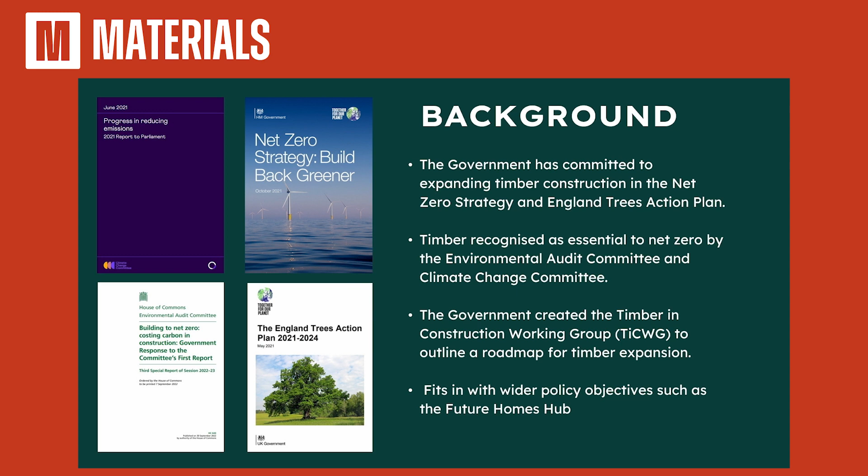You had a lot of heavy industries which were being increasingly regulated in the utilities sector, but construction wasn't looked at in quite the same way. And then, as government looked at it, with a variety of different reports, particularly those from the Climate Change Committee, they realised that particularly the embodied emissions within construction materials were a huge factor towards the overarching emissions profile of the construction sector as a whole, and that we needed to do something more about it. What was an obvious material to turn to? Timber. And so the Timber in Construction Roadmap was created, or Timber in Construction Working Group was created.

We've been through quite a timeline with it, as you can see, through a whole range of initially forming a kind of a sector plan, a whole range of industry subgroups, a range of industry and government co-workshops, both held with our own organisations, a range of other organisations in the sector, architects, engineers, different material sectors as well. Came forward to really at the end of last year was when we finalised the actual contents of the roadmap and the structure of it, and then published it in December 2023.

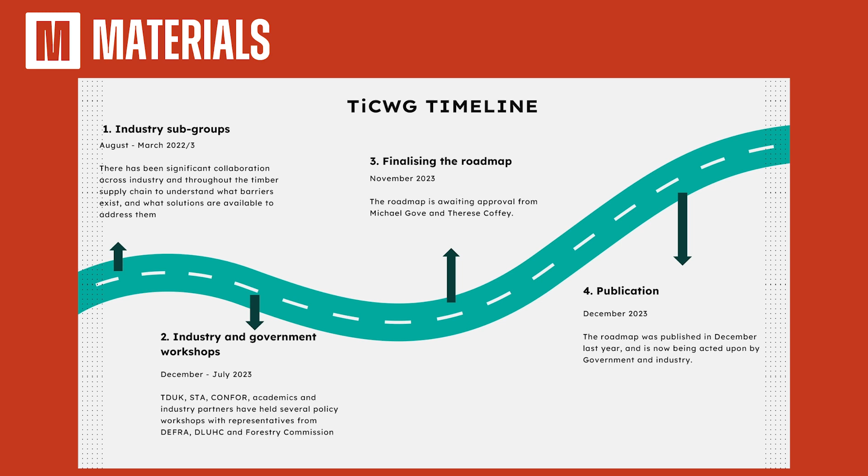And you can download that if you Google it on the gov.uk website. You can download that report, you can download the whole roadmap, and go through all of the different areas that it details. In particular, we had 7 different working group themes throughout the whole area. And I've got to say that within this, there were several kind of policy objectives trying to be met at once.

Within the whole climate sphere, it's not just the materials we use, but also the supply chain. Within the timber industry, the government recognised that if we want to meet our climate targets by 2050, we're going to have to grow a lot more trees, and our forestry sector is a hugely important part of that. So on the supply side, they saw this as a market mechanism to stimulate the growth of forests and stimulate the planting and management of those forests within the UK.

They looked at demand and how we're going to build up demand, building safety, as Andrew has mentioned, the insurance sector, and how do we reassure that sector about building with timber, carbon and all the questions around it, getting clarity about how it's measured, how it's managed, what things are taken into account, what visibility we give to our products and the supply chain emissions and the buildings themselves, the skills that we will need to achieve this.

It's not uncommon in construction to be talking about skills. It's a problem for everybody, but particularly if you want the construction industry, which is a fairly conservative sector, to move and start building in a different way with different materials. Where are those skills going to come from? Who has the knowledge to start teaching them? How are we going to actually get that done?

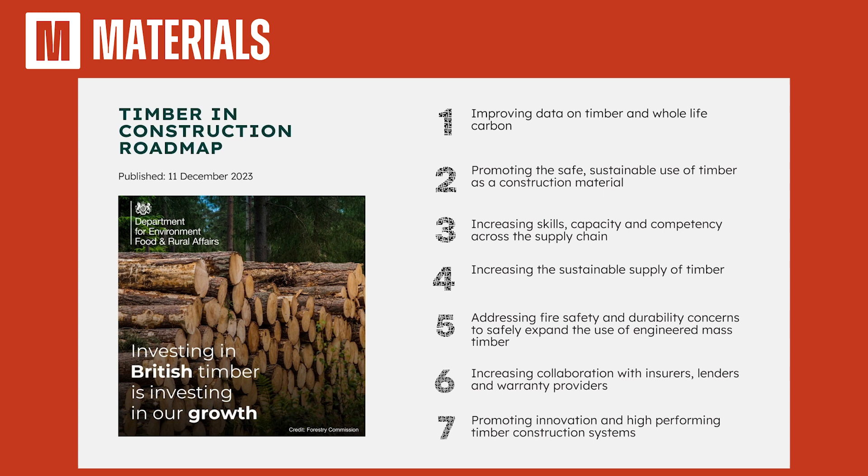So we're looking at improving data on timber and whole life carbon, promoting the safe and sustainable use of timber, increasing the skills, capacity and competency across that whole supply chain, increasing the sustainable supply, which is a big issue we can talk about in a minute, addressing fire safety and durability concerns, increasing our collaboration with insurers, lenders and warranty providers, and then promoting innovation and high-performing systems.

So those are the areas, and I just want to run through fairly quickly what those are, what we've been discussing, and then what we've been doing as an industry to make sure that we're meeting them all.

So in terms of improving reporting on embodied carbon, with each of these themes, there were a set of tasks that the government have said they will commit themselves to doing, and there's a set of tasks that we've said as an industry we will commit ourselves to doing.

So the government is going to look at putting embodied carbon limits for buildings in the future. There have been moves to try and put that through debates in Parliament and so on already over the past year or two, and I think it'll come back almost every year until it happens. I think there's quite an increasing groundswell towards it.

Looking at effective, proportionate ways of deploying broad carbon assessments, and really looking at the evidence base for the claims made, then working with industry to expand and improve the evidence around that. We've said we're going to continue our voluntary work to keep measuring and reducing embodied carbon, encourage the inclusion of data on all the projects that use timber, and improve the quality of our EPD database.

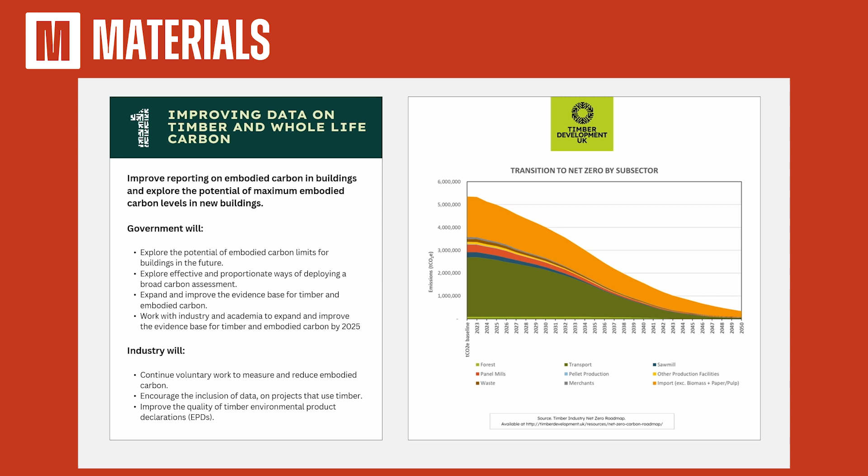So what have we done? Well, earlier this year, we released a whole EPD database for timber products. It covers about 95% of the common construction products that you're going to use in any project. It's got full life cycle assessment data on all of them. We've had all of those verified so that it's enough for designers, engineers, whomever, assessors, to be able to make those calculations using this data in a verified sense at the very outset of your designs and at the very outset of your project development.

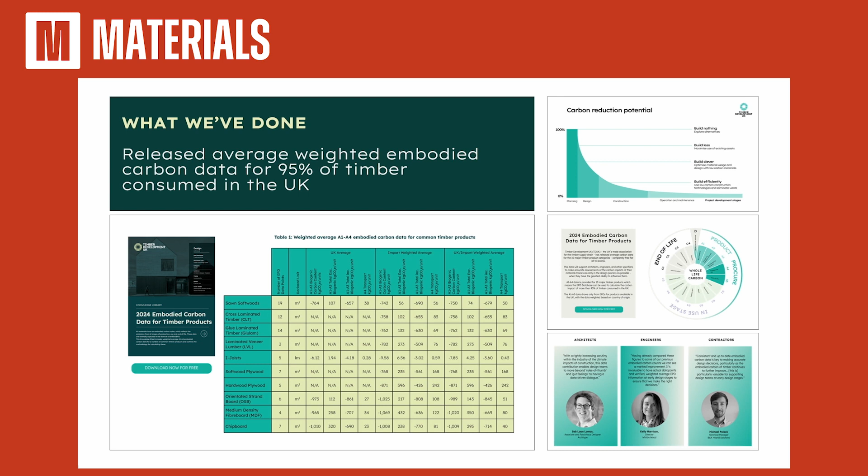So all of that data is available. Monthly now, we publish and run a webinar on a building case study. With each of those case studies, we've captured carbon data, the calculations that the engineers, architects or developers have used to get to that point, and we run those as a webinar. You can tune in, it's free. We have a lunchtime webinar every month, looking at those different case studies.

It talks about the whole project, and the carbon calculations and environmental calculations are a key part of those. We're going to keep doing those every month to keep pushing that out, keep familiarizing people with it, and try to move people towards a common form of assessment on carbon. But at least within each of those case studies, you can download them for free from our website, so you've got all of that data and information, and people can start making use of it.

So it's just some of those. Last year, we also published a net zero roadmap for the entire industry. Not so much looking at the carbon figures for the products, but really looking at the industry as a whole, saying how do we measure, report, and reduce the emissions through other activities, particularly transport, but also the factory operations, sawmill operations, and so on.

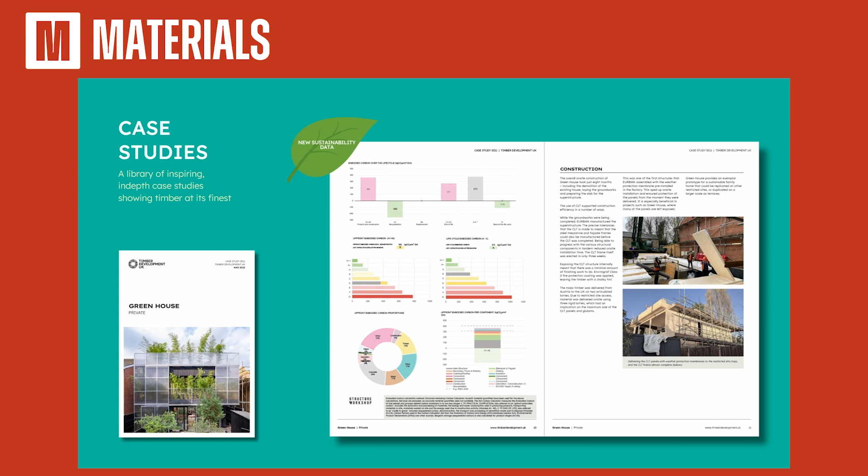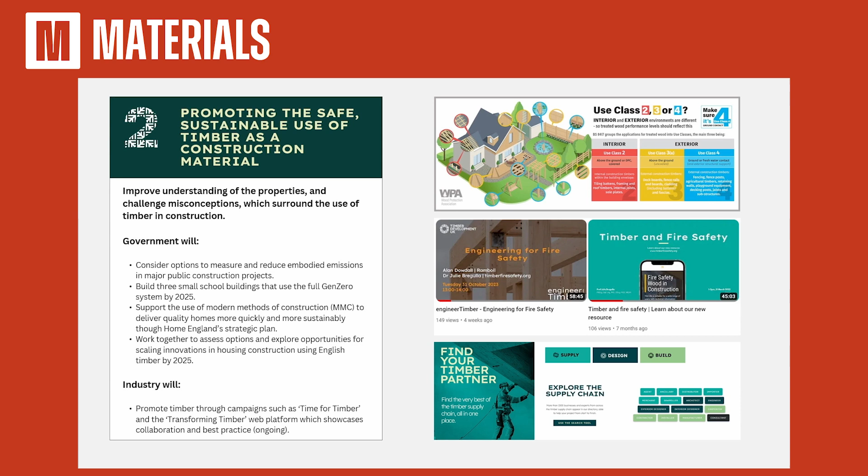The brown one there is one of the webinars I talked about, the Engineer Timber series that we run. We've created a timber and fire safety website between our three organizations, and we have a whole range of other activities between us. We've got a whole range of publications which are free to the market, so engineering data, architectural information, all those sorts of things on a range of different areas.

And there is a central campaign from the Structural Timber Association called Time for Timber, which you may have seen, and you can certainly follow that on social media. It's a very active campaign to promote timber.

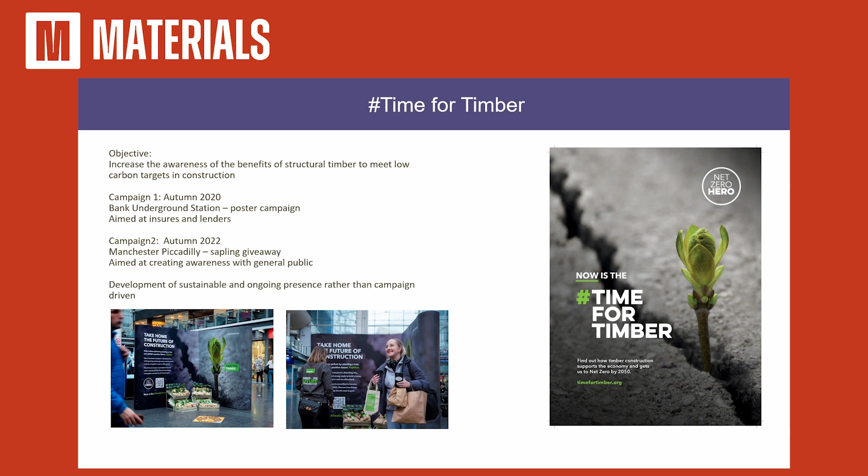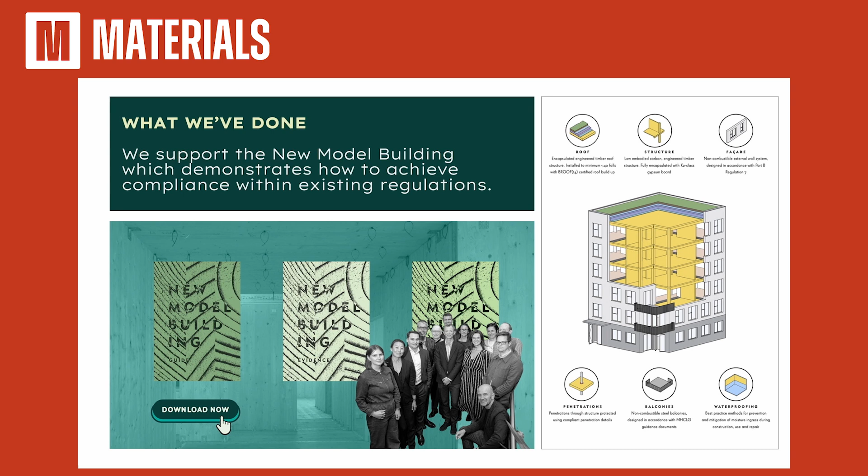We've also been looking at supporting a whole range of other activities, particularly the development of a range of details. This particular one was from the architects Waugh Thistleton, called the New Model Building, which is free to download and free to access, and it shows you how you can build mass timber buildings within building regulations, meeting the slightly stricter regulations from the GLA here in London, and those things have all been made available and free for you to use.

So in terms of skills, capacity and competency, and I said at the start, this isn't unusual to us, this is for everybody. Everyone in construction is facing a massive problem, a huge cliff edge, where I think the average age of most trades now is in the mid-50s, and those people aren't going to stick around forever. How are we going to build buildings in the future?

There is a really problematic point that we're reaching, and particularly with building in timber, we've still got to go through a process of teaching the teachers so that they can then teach others the knowledge and the skills. For anything that is considered novel, new, or innovative, that was always a problem to find the teachers to do that. We've got a range of things going on.

The government is establishing a multi-stakeholder committee, or industry forum, to look at how we develop those skills, map out where the key areas are, what are the flash points, what are the touch points we really need addressed now, and what do we need in the short, medium and long term. That group has been named and formed, has not yet met, but we will be meeting in the next month or so.

We're also looking at, the government is conducting research at the moment to really look at the workforce needs and demographics and how we're going to change there. And again, really working with industry to work out what skills we need and how we're going to do that.

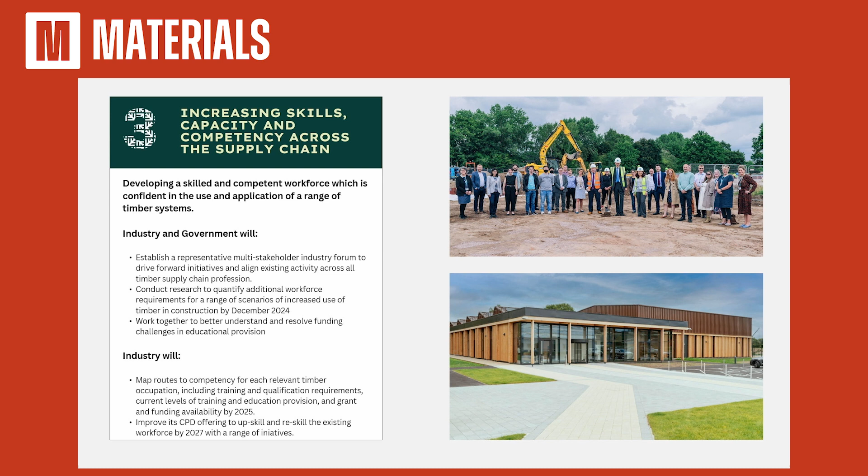So some of the things we've already done: we produced a timber in construction action plan last year. It was launched here last year, a year ago today, and it was a competency framework for the skills for design and construction. Looking at the supply chain, it was really on the design and construction side, and we started putting that into place.

So the first output of that competency framework was to develop a new course. It was the TED course, Timber Engineering and Design, which is taught at a new college, NMITE, the New Model Institute for Technology and Engineering in Hereford, done as a partnership with Edinburgh Napier University.

We've now run, I think, 50 learners through that course, ranging from architects through to people working in truss rafter plants or joinery companies, who can get together to blend their skills to learn the skills you're going to need for timber construction. So we've had a lot through there.

That course has now been disaggregated to make it even more accessible, into a series of shorter courses, partly online and partly in person at workshops. So that's come through really well.

We're going to be building on that now to look at a whole range of other programs that meet other elements of that competency framework, particularly contractor training and how you get the construction management process right for timber construction, which is a problem. Maybe it's not seen as a barrier because everyone thinks they can do it, but getting it right is a skilled process, and we need people qualified enough to do that.

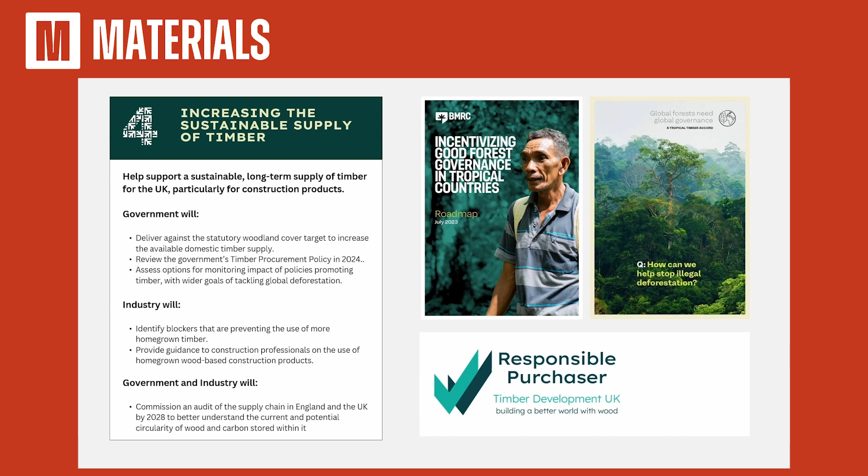On the responsible purchasing scheme, the organisation I run, Timber Development UK, represents the importers and distributors in this country. We've had a responsible purchasing scheme since about 2012, and it's a mandatory condition for membership. It means all members have to have a third-party assessment looking at the due diligence they're doing on their supply chains, to make sure all the timber they're bringing into the country only comes from legal and sustainable sources. We're doing a lot of work around that.

In terms of promoting homegrown timber, we do a lot of that as well. We've just recently published all of the C16 span tables. If you look at the grades of timber, a lot of the imported stuff from Scandinavia is C24, while the stuff from the UK is C16. We've published a set of span tables, free to download, showing that for the majority of house types and construction projects in this country, C16 homegrown timber is perfectly adequate and acceptable, and you can build with it.

I think there's a slight snobbery when you show people two different products - if one has a higher number than the other, that's the one you want because you think it's better. But actually, in terms of getting a product that is fit for purpose, so that you're not over or under specifying, C16 is perfectly okay. We have a lot of work now to demonstrate, not to promote one over the other, but to show what is achievable using homegrown UK timber.

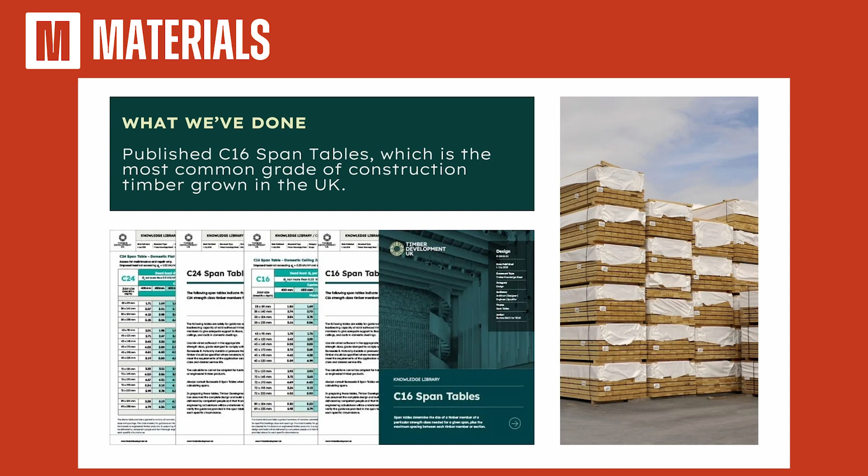Then when it comes to the more meaty end of the priority themes - addressing fire safety, durability concerns, to safely expand the use of timber - we've got a whole range of commitments. The government is going to work with us, with academia, with the Building Safety Regulator, to look at all the safety, durability, and competency questions, and see how policy could change to allow things in, how design could change, and how new details and new innovation in design can come through.

We've committed to continue supporting the Fire Safety Hub. We've got a website developed between our organisations - timberfiresafety.org, it's got all the words there. If you Google Timber Fire Safety, you'll find it. We'll keep on doing that, putting all the information up. It was only published last year, and it's got all the principles for design and for designing in timber with fire in mind.

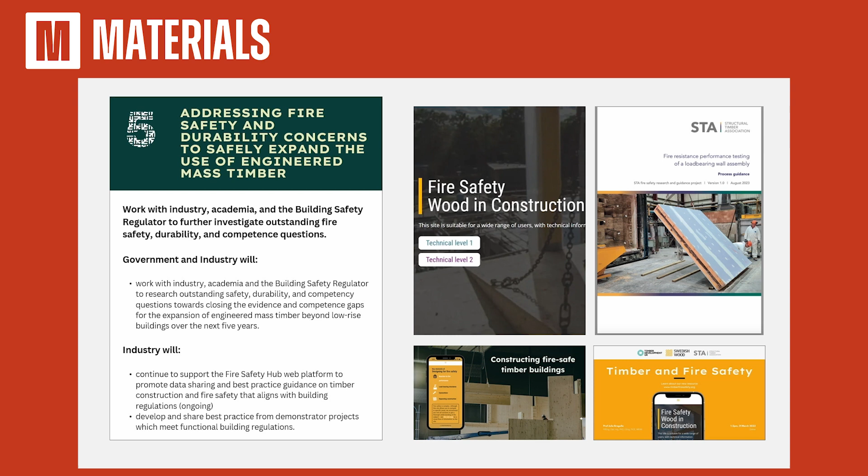And then we're going to keep putting up more information, more case studies, more details, and so on. We want to develop and share best practice from all of the demonstrator projects we've got going around the country. You can also download for free things like test data from that website or from the Structural Timber Association website.

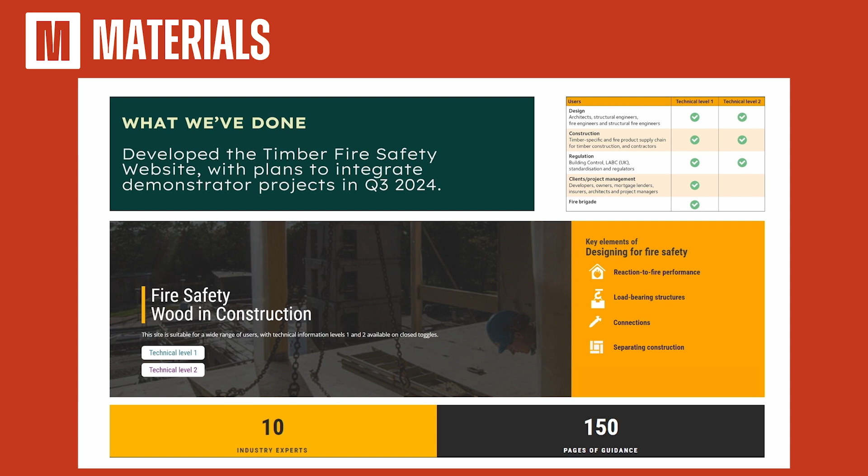So we've developed that website. Please do look at it. There's a whole range of other fire testing. I think the STA has spent over $250,000 over the past two years on fire testing and redoing old fire tests to make sure that things are relevant and up to date.

When we come through on the more commercial questions about increasing collaboration with insurers, lenders and warranty providers, all of that fire design, fire testing, fire guidance and fire design work is going to be key to them as well.

But we also want to look at the process of building and the process of getting insured, and what the different steps are to make sure that an insurer is assured that this is a safe building and understands what's going on. So we're working together with government on this to explore the feasibility.

Creating an asset register was one of the key asks in the roadmap, and working together to get greater dialogue between the insurance sector and developers, so that we can get a far better understanding of what the risks are, where they lie, and how you overcome and mitigate those risks.

Often, coming back a few steps, the risks are not the material - it's the skills and competency involved in putting the buildings up that really cause an issue, rather than the actual material itself.

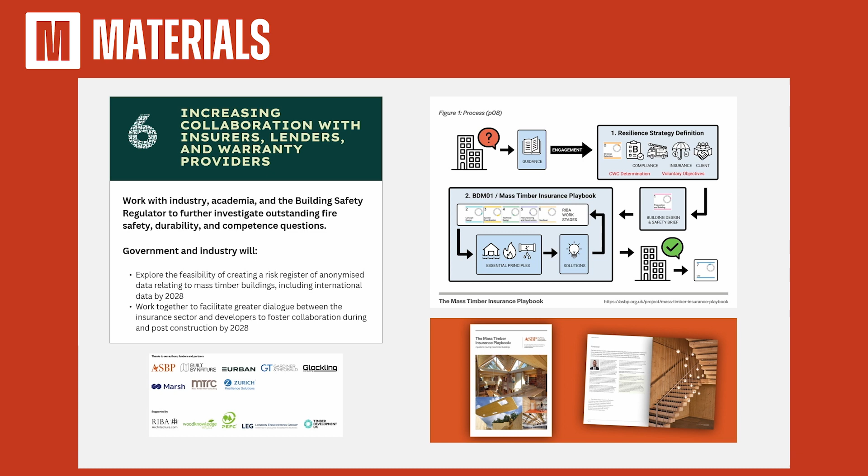So what have we done? Well, the STA Assure scheme is one that's now recognised in a lot of specification documents. This is a whole kind of supply chain program from factory through to construction.

It ensures that the manufacturers and the developers are working together. It's a whole range, it's an audited process, so that you have design and engineering standards, manufacturing controls, factory production controls all the way through, quality assurance, and that all of the follow-on trades are aware and knowledgeable about all of the care points and the duty to warn about them.

We've got a couple of other projects in development. It's a very early stage and they haven't reported back yet, but we should be able to get these going this year. We've had one meeting for each of these, and they're both projects really aiming to improve how risk is communicated, measured, managed, and got through.

So the first one is about a durability workbook. This is looking at one of the projects that has already come through, the Mass Timber Insurance Playbook, which is a guidebook for insurers in particular about the stages they need to look at, and about engaging early with your insurer, contractors and designers and design team, so that everybody fully understands the project being developed.

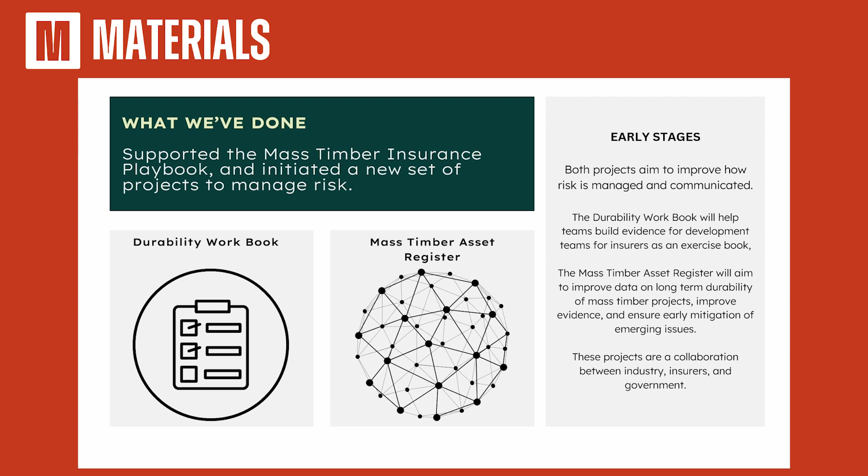It's a bit of a difficult one to manage, just in terms of privacy, data ownership, all of that sort of stuff, but I think we will be able to get through it. Those are, like I say, very early stage, and we're going to be developing those through the course of this year.

And then, when we look at promoting innovation and high-performing timber systems, really, again, we've got to work with government, got to work with the building safety regulator to further investigate what are the outstanding fire safety, durability, and competence questions that we need for this sector.

The government's committed to publishing a new PAS, publicly available standard, specification standard, for modern methods of construction, which will include timber, and promote the results from the Timber and Construction Innovation Fund.

So as part of when we looked at those seven themes within innovation, they set up an innovation fund. They've got a number of demonstrator projects which are going ahead now, particularly around the Gen Zero schools, and they're going to be publishing those either later this year or into next year.

We're going to carry on publishing. Like I said, we publish these case studies every month. We're going to publish knowledge, promoting the best practice throughout the supply chain, and make sure that it's freely available.

So we've got a timber knowledge library, which really goes from all of the basics up to very specific and technical areas, and we publish our case studies and webinars every month. There's about 150, I think, of these knowledge sheets and knowledge library documents that will be available by the end of this month.

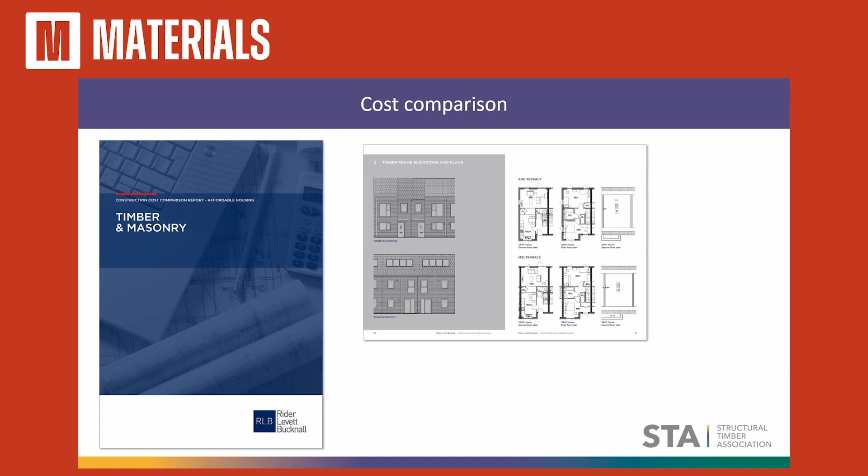It initially looked at just housing, but they're looking at a whole broader range of building types and sectors in which to put those. And that will be published probably later this year or early next. It's a live project which is going on right now.

So just as I finish, before passing over to Alex, why now? Why are we doing it? Why have we got this thing on the Timber and Construction Roadmap? Why is there all of this interest?

If you look at all of the talks and debates at COP26, any international talk, everybody recognises the importance of forestry. Everybody has failed to do anything about forestry.

And I speak as someone who has been working in environmental markets for about 25 years and remember trying to get offsetting projects, REDD+ projects, and all manner of different things coming through. They're very slow. What does work to expand forests is when they are a commercial resource.

And if you look, where you get the regulation right, and you get the sort of sustainable regulation throughout the entire supply chain, and you have a strong timber construction sector, you'll see that the forests are growing. So particularly Europe, particularly North America.

If you look at areas which get regulation wrong and struggle with regulation, you'll see that forests are shrinking and seen as something in the way of doing something else. Whereas if you have this as a valuable commercial resource, you'll see that all of those trees represent your bank balance, and you want that balance to grow. So that's a big pressure on governments and policymakers everywhere.

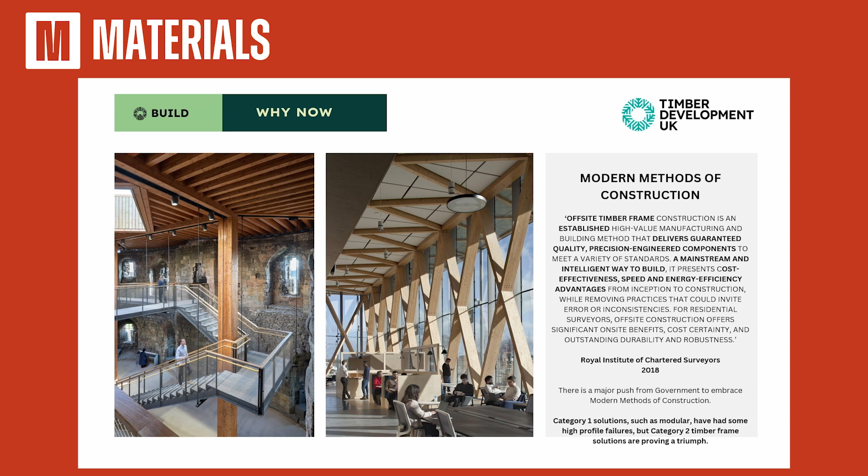Architects, designers, and others are calling for this, and there's a lot of pressure on the construction sector as a whole, from the design sector, to do more. There's also pressure from the construction sector, given the skills shortage, saying we need more modern methods of construction, we need to look at how we manage our emissions, and we need to do more with timber.

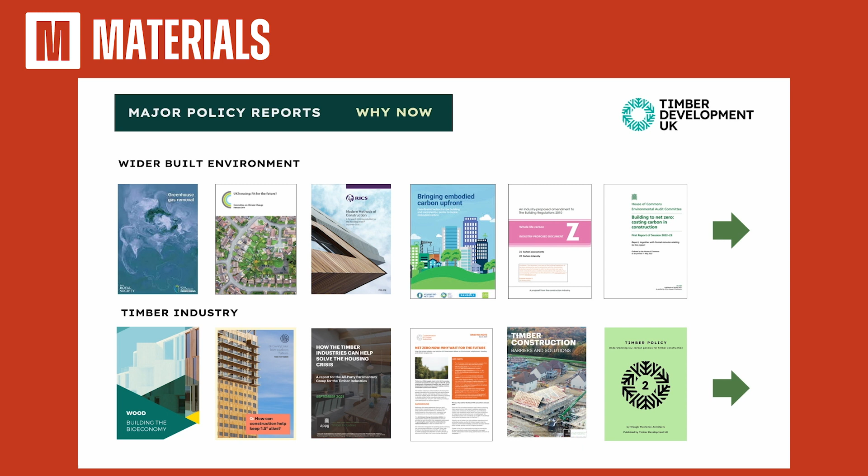So how are we going to do it? We've seen every single policy report from every think tank pointing this way, towards a fairly obvious solution of using more timber in construction. And we've seen what's happening with the climate and the reasons why we need to reduce our emissions.

Recently, to try to educate people a bit more, we wanted to make sure policymakers were aware of the different policies that can encourage the use of timber in construction. We started with a book called Timber Typologies, to show that not all timber construction is the same. Different methodologies achieve different building profiles, and different timber kits are more appropriate for different buildings.

We also published this timber policy book, an analysis of all the different policies happening around Europe and other parts of the world, at a national or municipal level, to encourage the use of timber in construction, and whether or not they would be appropriate and applicable here.

I'm going to end on a slightly more depressing note. We're under no illusions - when we talk about more timber in construction, we also need to recognise the context this is happening in: construction and house building in particular is very flat, so getting that back up is going to be difficult.

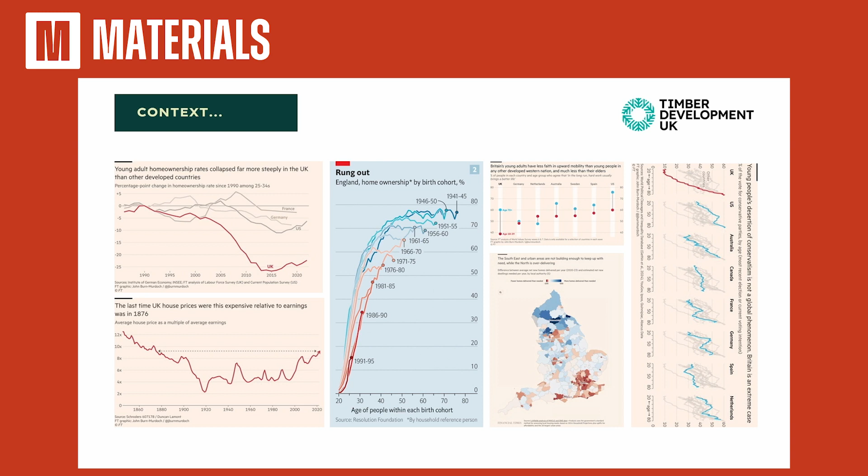What we want is to make sure that when that market comes back, timber takes a greater and increasing share of it, and that will require a lot of policy intervention, as the reports that came out last week showed. During an election year, we'd ask you, as industry bodies and as voters when you go to the polls, to think about who is doing something about this, what will they do, and how will they do it. I'll end on that point, and pass over to my colleague, Alex Goodfellow.

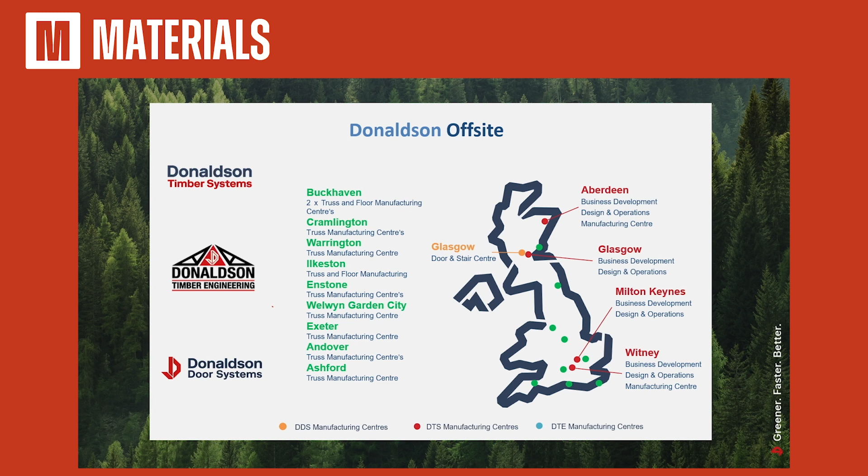So to the market context, I guess, and challenge that we currently face. Andrew mentioned, as did David, that the house building market is perhaps not at its best. I'm not here to talk the sector down, but we've had better times. I hoped we might have heard something yesterday in the budget to help the house building market, but sadly lacking again. But nevertheless, the market will return. These macro dynamics do always bounce back, but things are tough.

We have a homelessness situation in the UK. I think everyone understands and I believe accepts that we need to build more housing. Interestingly, we have an industry capable and ready to do that in housing and in manufacturing. The macro conditions around inflation and mortgage rates don't help. And as if that wasn't bad enough, we have a skills shortage. And also we've had some high profile failures in the MMC sector and the modular space, which is unfortunate.

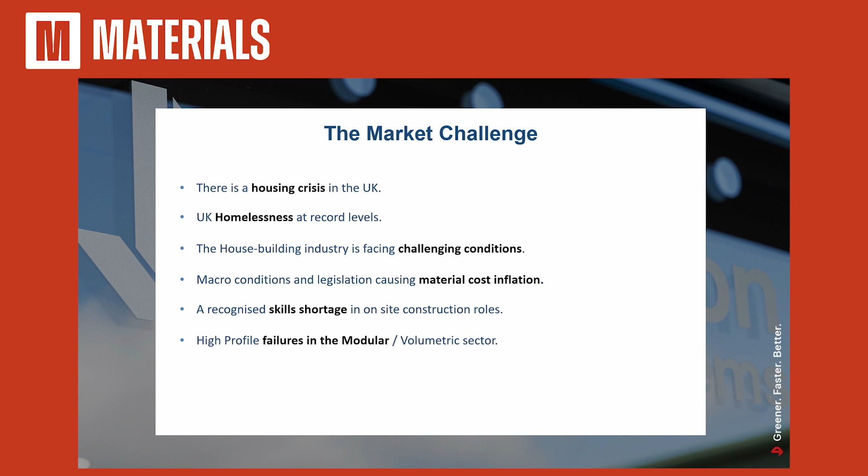And again, what we're here to do is to define some of the good work that our sector and businesses like ours, many of our STA and TD UK members, are doing. Our response to that challenge really is to say, as Andrew mentioned, that timber frame construction in Scotland is over 90%, and the homes globally would be the same in North America and other countries throughout Europe. England is the exception currently, 10%, but growing rapidly.

So the sector is well placed, and we also see the major house builders entering the sector as the future home standard improves the requirements for the quality and energy efficiency of buildings. House builders are responding to that challenge by moving into the timber frame space, a recognised, well-established space. So we can work to help solve that housing crisis and meet the higher demands of appropriate legislation. The capability in the off-site panelised space is very real. There is a manufacturing member in every county in the country, and we see a time for growth coming.

Perhaps weather the current storm and get the election behind us, but we certainly see a growth curve coming in the house building sector and the manufacturing of MMC product space going forward.

This image is one of our factories, one of our main factories in Witney in West Oxfordshire. We've been here 20 years.

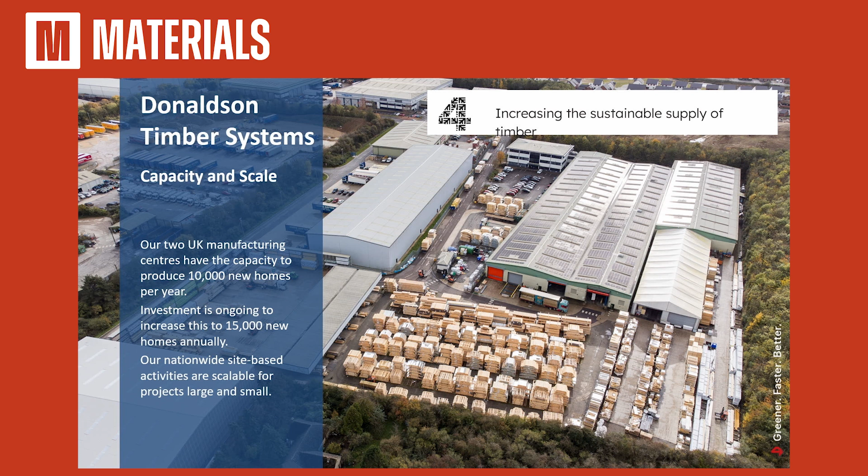We only utilise sustainable materials, and we'll be delivering maybe 20 homes a day from this facility in any given period. We also have a factory in Scotland doing similar numbers, and we're looking to grow our nationwide coverage. This is the inside of our factory, just recently refurbished in the last year.

The two yellow robots here, that's Remus and Romulus. We just brought them over from Sweden. We've invested many millions in a new automated wall line and floor line to make closed wall systems with pre-fitted windows and doors, pre-finished floors in that factory, essentially to ensure high precision, high quality products going into the built environment with high sustainability and low carbon, as well as taking a significant step towards helping solve the skills crisis currently within the construction and trades sector.

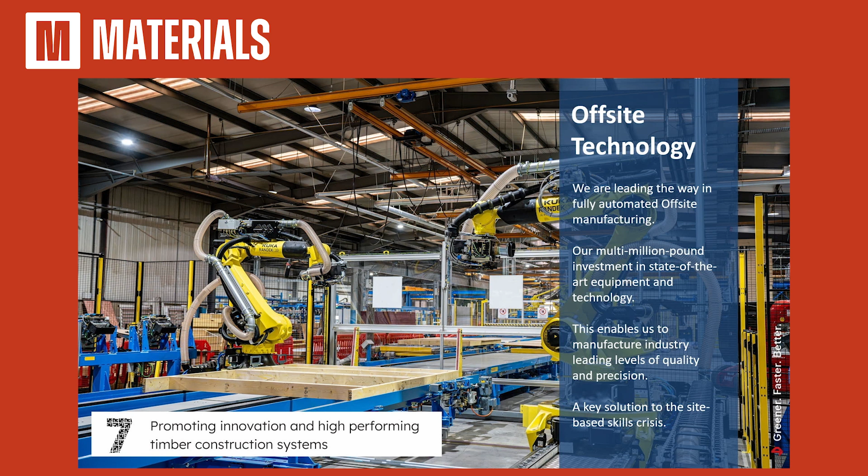This here is an image of one of those panels I spoke about, closed, insulated, with the wall and a window in it coming directly from our automated factory.

We have 500 installers working across the UK and Scotland, mostly in England. We certify, we check, we audit everything that is built. So when the house builder, when we finish our part of the process, we'll have a digital file kept on record to ensure that everyone understands the competence applied and the standard provided for the house.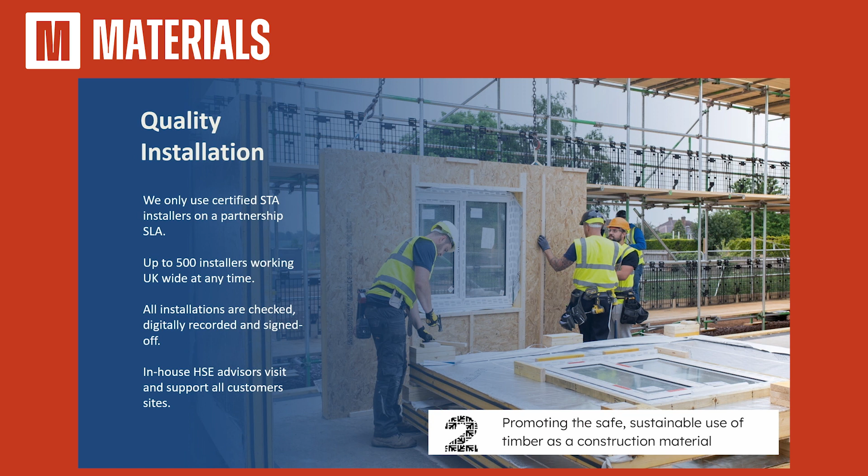Obviously, health and safety is a particularly high priority for all businesses, so we work to all the latest health and safety standards, and building in an off-site manner reduces risk on site. Knowledge is key in any complex construction situation.

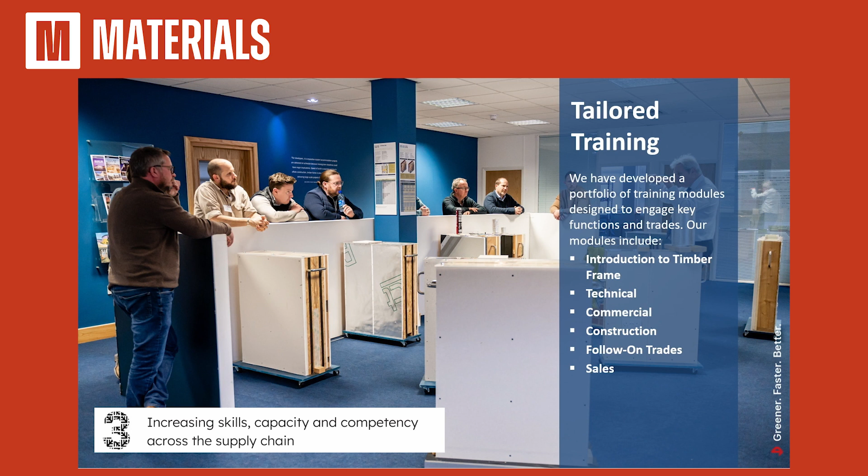So again, responding to relevant elements of the roadmap, responding to creating an environment for growth, where if you're going to build something, you want surety that it's built with competent individuals who can demonstrate their capability, that they are trained, they are knowledgeable. You can rest assured that your building is of the appropriate standard.

Research and development, again improving data on timber and whole life carbon, is one of the first main themes of the roadmap. Our business has a history, as indeed has our sector, of research and development. We built the first code level 5 - for those of you old enough to remember what that was - a major step towards sustainability, high performance, and energy standards, in 2007 at the BRE.

We've been involved, in conjunction with many of the major house builders, in research programs improving MMC and the value on site. And most recently at Salford University, you may have seen the energy lab there, where 2 homes have been built inside that black box at the university.

We worked with Bellway Homes there, alongside Barratt Homes, to build 2 houses indoors that are currently being monitored for as-built performance, again to provide surety that the performance of the building does in real time what it actually said it was going to do during the build process. And finally, recently this year, as David referred to, we've produced our EPD for timber frame floors and walls. So if you're a specifier or a builder and you want that comfort that the timber sector needs to give you, then we're able to provide that from a history of innovation and R&D.

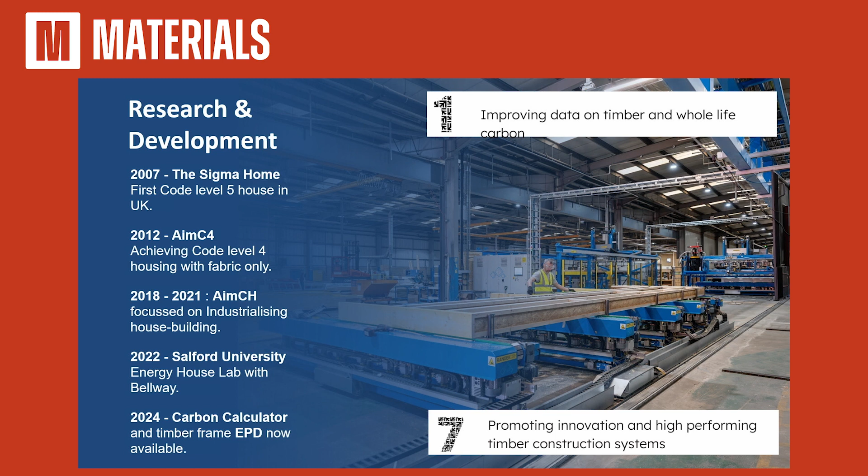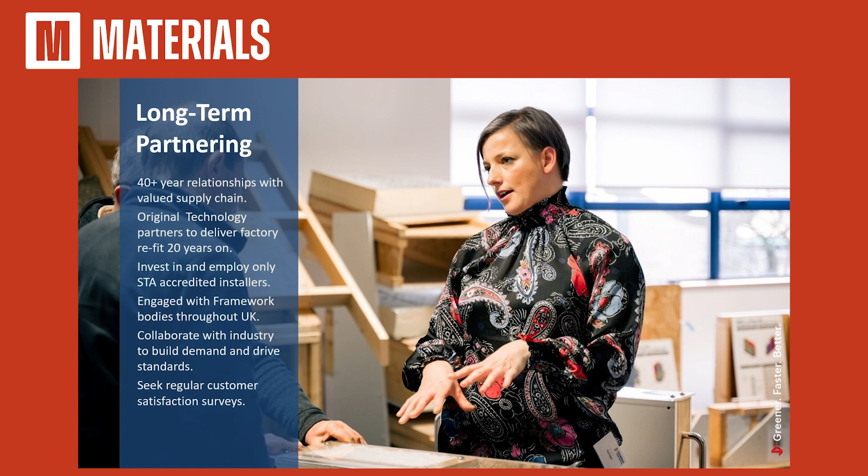In any business, partnering is key, whether that is with your stakeholders, customers, or supply chain. We've refitted our factory with the same technology partner we built it with 20 years ago, a company called Randek, who are highly skilled in automation, based in Sweden. We have a 40-year relationship with our main timber suppliers, so it's a business built on loyalty in all directions. We work very closely with many local authorities, government bodies, and of course our customers. So again, partnering is alive and well, and still very fashionable.

And how do we see the market going forward? Andrew mentioned the disparity in proportion of housing that's built in timber in England compared to other parts of the UK and indeed the world.

How are we going to do that? Why would people do that? Well, they'll only do that if they have confidence, and if we have accreditation by third parties. Everything that we build, and indeed many of the STA member manufacturers, will be the same. Our products all have BBA approval. They all meet the standards of the NHBC Accepts programme. We have BOPAS accreditation, third-party accreditation, to ensure that you can buy timber products with confidence.

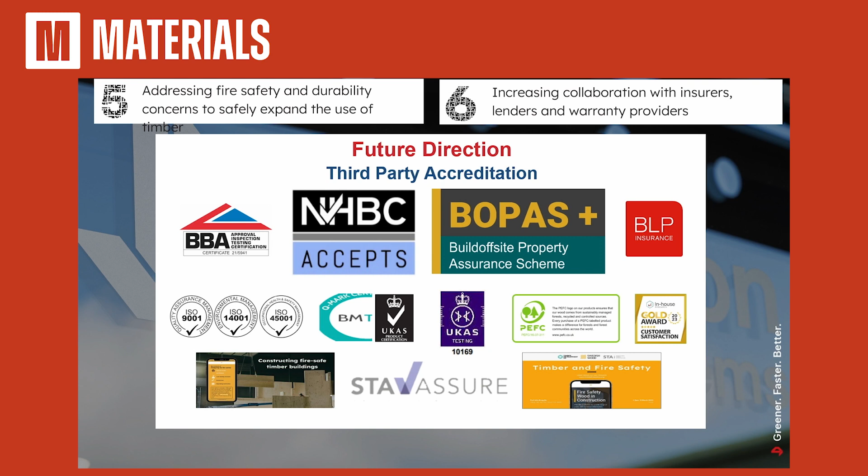Everything that we make has a fire test done for it. We won't make anything if we can't prove that it meets the fire standards, and we work closely with a number of organisations to ensure it is a high-quality, reliable, sustainable, warrantable product that people are specifying. And whilst we may be the biggest in the sector, I could say safely that all businesses within the Structural Timber Association are doing the same thing, so we have an industry-wide capability that you can specify with confidence.

And finally, the 7 themes of the roadmap that David explained in enormous detail are alive and well and relevant in our business. We'll be working to ensure we take the benefits of that roadmap forward, that we meet the challenge that the government has set, and we create an environment where one day all homes will be built this way, even in England. Thank you.